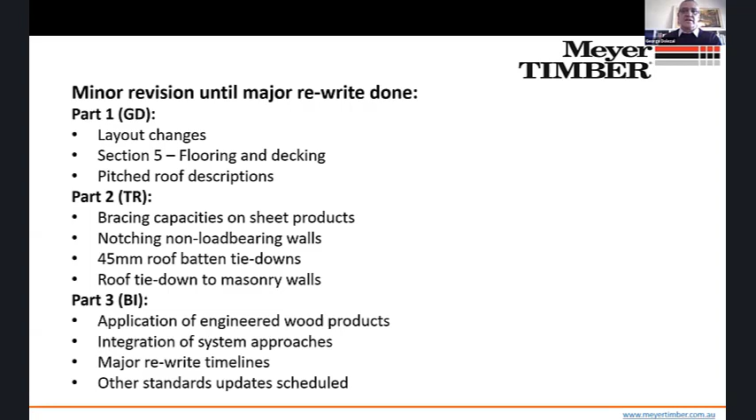To start off with, what standards does this apply to? AS 1684 has typically been broken up into 4 parts, and this 2021 revision refers to AS 1684 Part 2, which is the non-cyclonic areas, and AS 1684 Part 3, which is the cyclonic areas. Looking at the other standards in the group, AS 1684 Part 1 1999 was used and is still used as a basis for the span tables in the supplements, so it's still current and available.

Most of you will know that this has been superseded in 2016 with AS 1720 Part 3. AS 1684 Part 4, the simplified non-cyclonic version, is still current and is based on the original AS 1684 Part 2 2010. Being a simplified version, it's not extensively used but is still current at the moment. Finally, we look at the supplements or span tables to both AS 1684 Part 2 and Part 3 - they remain unchanged at present.

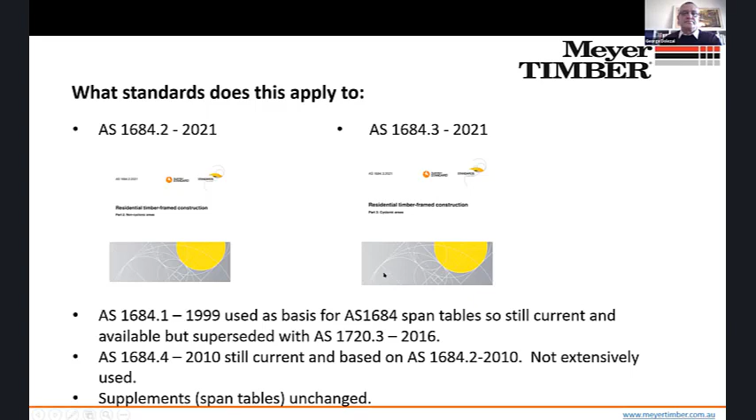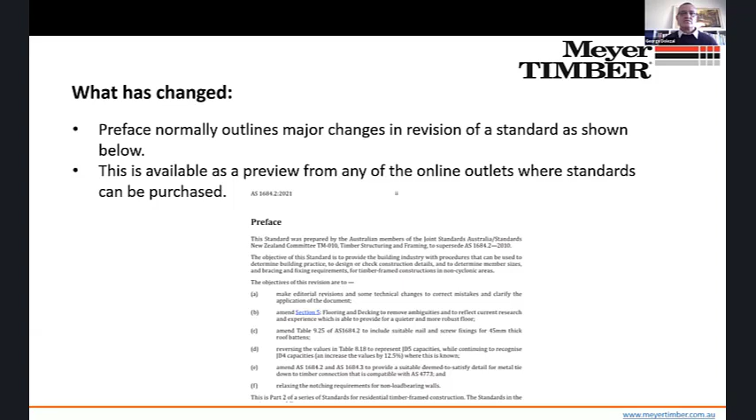If you really want to know what this is before you buy a standard, or want to see what has changed, you can go onto any of the online outlets - I'll note these at the end of my presentation. If you access that standard, there's a preview page, which will usually give you the first 5 or 6 pages, normally through the table of contents and the first page after that. So you'll actually be able to look at the preface and see what's been changed and what the major revisions are in the current version.

So AS 1684 Part 2 and Part 3, what changes have been made? First, there are administrative changes - there's been some changes in the order of sections to match the protocols for current standards.

An example of this is the terms and definitions, which in the 2010 version were in Section 2 and took up a large part of it, whereas now they've been brought back to Section 1 to bring it in line with the current protocols on how standards are laid out at the moment.

There's also been a number of changes to comply with accessibility requirements for online documents. This is a protocol that Standards Australia have chosen to go with to allow accessibility for those who require it. When you look at online documents, things like reading views and automatic reading of documents, certain protocols need to be taken to allow this to occur effectively.

The main areas you'll see changes are in the tables, particularly in Sections 8 and 9 - Section 8, the bracing section, and Section 9, the tie-down section. There are a lot of tables there which were combined.

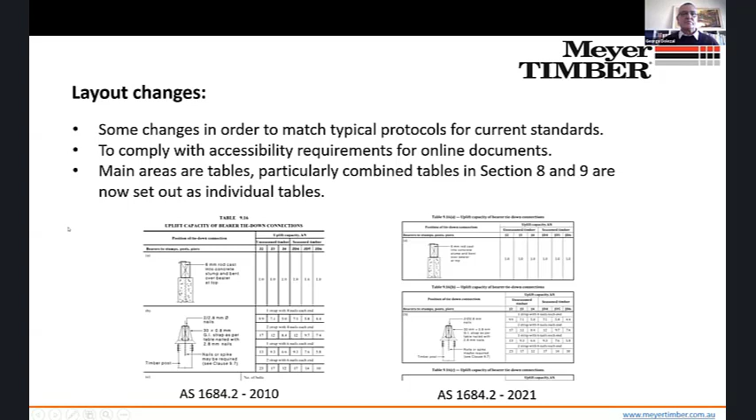That means you'll also find that the document, which was 270 pages long or so, is now about 320 pages long, just to allow for the extra room to have all those extra headings and changes. It's not that anything technical is affected, but there are some reasonable layout changes in there.

If we have a look at the section on flooring and decking, section 5, one of the main things that was confused a bit was what type of flooring and decking did that mean to take into account. So there's been a clarification there saying that it's for structural strip flooring and not overlay flooring. That's included both in the original general section at the beginning, where it says it has to be laid as a structural element directly onto the joists, and it's not applied to timber flooring that is fixed over the top of a structural subfloor. So it doesn't relate to overlay or engineered floors.

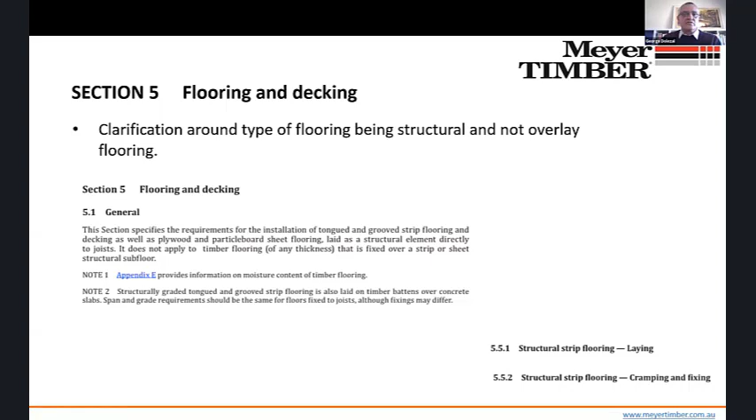And then in each of the sections after that, as you can see in the bottom right-hand corner of the slide, we've included the word structural in there. So you've just gone from strip flooring now to structural strip flooring. Note 2 as well says that it will also comply to structurally graded flooring that's laid on timber battens over concrete slabs. Again, so this section is totally on structural and not engineered overlaid flooring.

If we have a look at the expansion joints, a couple of minor changes there just to keep in line with current practices, in that if you're doing a wide expansion joint, that's been increased from 10 mil to 12 mil, and there's a requirement there to have a cork-filled gap and have it blocked underneath that.

So there still is the alternative there to have a number of smaller gaps rather than the one expansion joint, or to have the boards loose cramped if you've got quite a large width there. There's also been a note added to that section which gives you more emphasis on acclimatisation and trying to make sure that the moisture content of the boards matches the in-service moisture content.

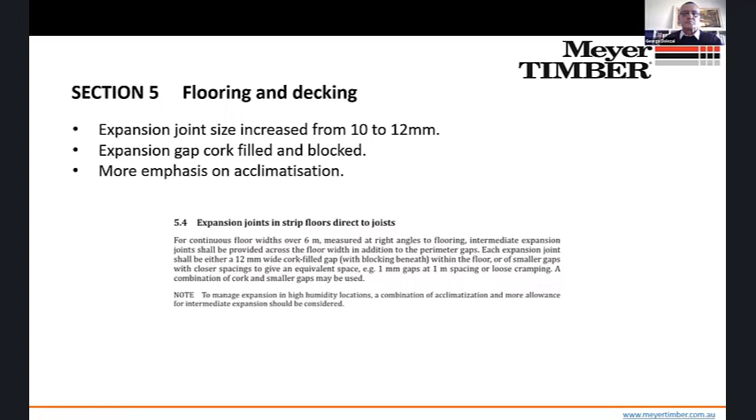From here we look at the nailing of boards. So there's been a single nail fixing allowed for boards up to 65 mil wide. We've had a requirement there that flooring adhesive is required for all boards over 85 mil wide face fixed. And if you have a look at the section, it says that the mechanical fixing shall be supplemented by a minimal 6 mil bead of polyurethane or polymer flooring adhesive. So that shall means that it's a mandatory requirement.

In standards, the word shall means it has to happen to comply with the standard, and the word should is a strong recommendation.

The other thing that's happened in here is if you are face nailing, there's a single option for nails, and engineered wood products have been included. Table 5.1 used to have different nail specifications for hardwood joists or softwood joists, whereas now it is a combined specification. So it's one nail, 50 mil long nail, for hardwood, softwood, LVL or I-joist joists underneath.

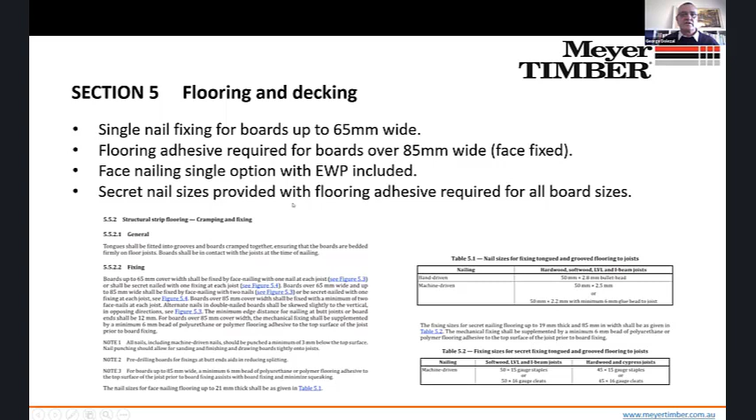And finally, we've added some secret nail sizes into the specification, and flooring adhesive is required for all board sizes. The 2010 version of the standard did not have any recommendations for sizing of secret nails for the flooring.

If we look at plywood and particle board flooring, there's been no changes there. The only addition has been a note, and again, notes in the standards are recommendations. So a note suggests that if you're putting an overlay flooring on top of a sheet flooring, like a plywood or a particle board, and if that overlay flooring is above 750 kilograms per cubic metre, so a hardwood overlay flooring, then it's recommended that you put screws and adhesive to fix the plywood to the joists. And that is both for plywood and for particle board flooring.

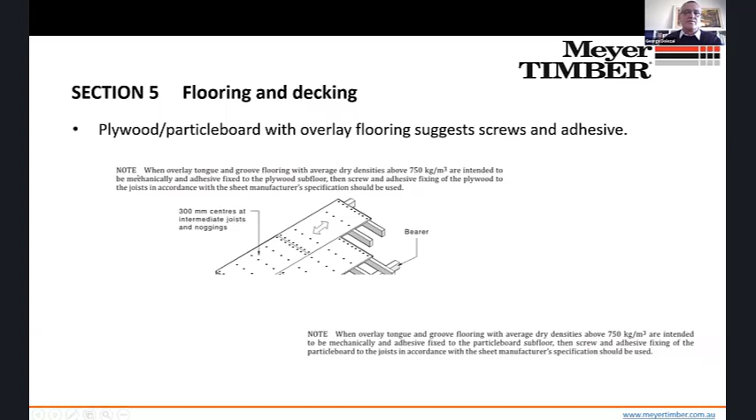And finally, in section 5, with the clause on decking, clause 5.8, the maximum deck board used to be 100 mil width, but now it's been increased to 140 mil width to allow for the increase in those medium-sized decking boards that has been taken up.

And screw fixing has been included for decking boards. So again, only being a recommendation, on table 5.5, note 1 down the bottom allows for a 10 gauge by 50 mil long screw to be put in for boards. So they're really all the changes for the flooring and decking section.

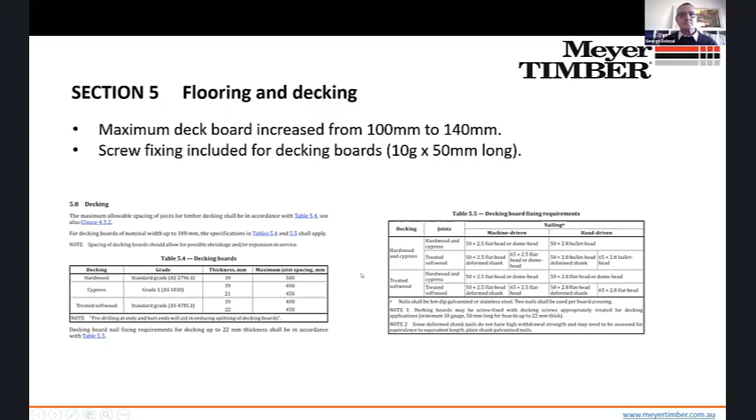Now, if we look at pitch roof construction, there's clarifications really around the two definitions. When we have a pitched roof, there's two types: we have a coupled roof and a non-coupled roof.

The definition of a coupled roof says there are horizontal members that combine with opposing rafters to create a triangulation of the roof structure. The note down the bottom says that in a coupled roof, both gravity and wind forces can be resisted by axial forces.

In the rafters, collar ties, and ceiling joists. So those two words, triangulation and axial forces, mean that a coupled roof has to include those three components. It obviously includes rafters, but it has to include a collar tie and ceiling joists. Especially those ceiling joists, which are at the support base level, provide resistance to the axial forces and stop spreading of the rafter pairs.

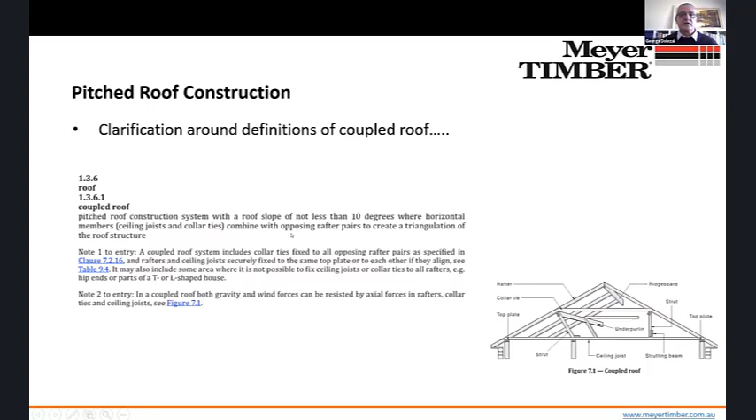If you compare that to a non-coupled roof, it's quite simple. A non-coupled roof does not incorporate triangulation. That means that rather than having ridge boards, collar ties and ceiling joists like in a coupled roof, a non-coupled roof requires ridge beams and intermediate beams. These are full support beams that support the roof.

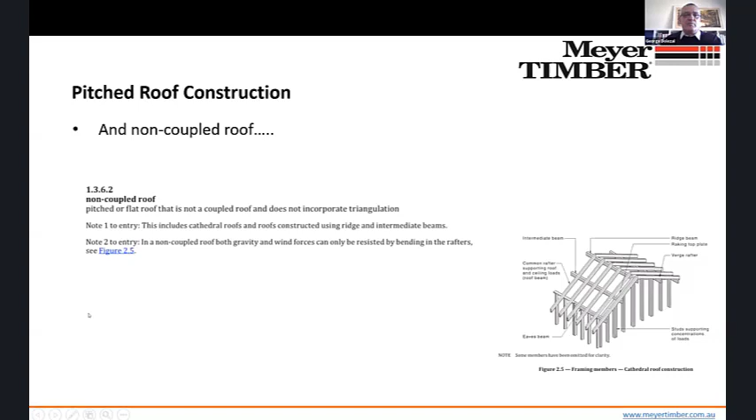Now, that doesn't mean that you can't actually build that or do that. What it means is that roof needs to be specifically engineered, and especially the connections and the design of the rafters need to be engineered to resist the loads.

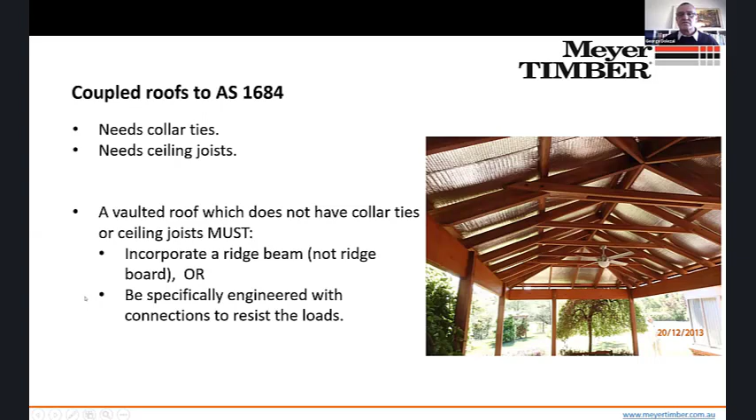So if you have a vaulted roof in a house, which is becoming more common in certain areas, al fresco areas and things like that, if it doesn't have collar ties or ceiling joists, then it must have a ridge beam, or it must be specifically engineered with connections to resist the loads that are applied to it.

Okay, so there you go. That's the end of part one.

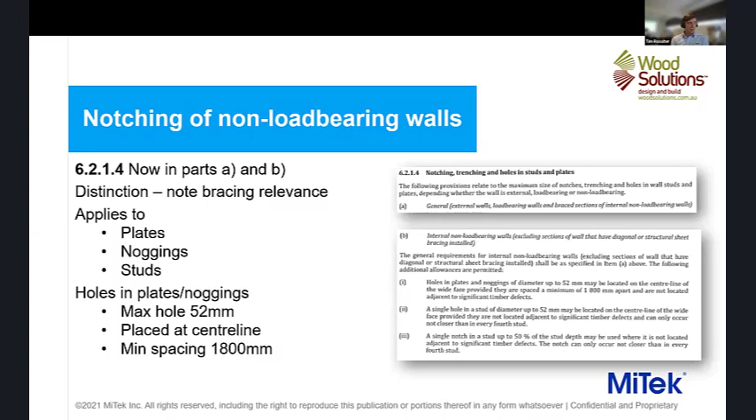If we move into studs, same thing, 52mm hole. You're only allowed 1 per stud, and it can only be 1 in 4. So that means if you've got a requirement for an HVAC plumbing system or pipe work going through non-load bearing walls, if you're going to this sort of size, you can't put it in a line stud by stud by stud by stud adjacently.

Also talks about notches - maximum 50%, only 1 notch per stud, and again only 1 in 4 adjacent. Now it does make a comment in the code, which is up to a little bit of interpretation from those doing the inspection, and that is that it's not to be adjacent to a significant timber defect. So it's up to the judgment of the inspector or the carpenter or whoever's putting the hole in the stud as to what a significant defect is and how close adjacent happens to be.

So a bit of common sense - you've got a loose knot, you go put a 52mm hole, there's not much timber left, there's more air. So keep things a reasonable distance away. And I use as just a generic term 'not adjacent to'.

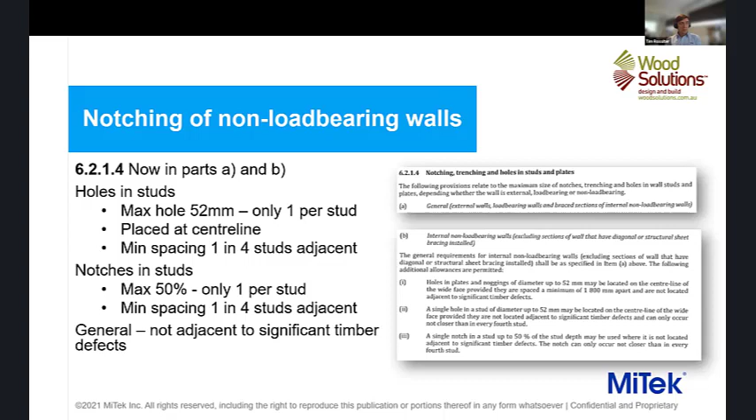A couple of notes from things that didn't make it into the construction practices, and that's a clarification on block grading. There's been some discussion in recent times around the requirement for members within a wall frame to be graded - which one should be, which one shouldn't be. It's clearly noted that noggins are not required to have a structural grade. It's not clearly noted that blocks are not required to have a structural grade.

And there's a standing request for change in the next round of 1684 that's been put up to try and deal with the fact that the code is silent on whether blocks should be graded or not. There's been a bit of interpretation in both directions from multiple people, but there are no specific instructions within the code. So that's a hole that just needs to be plugged.

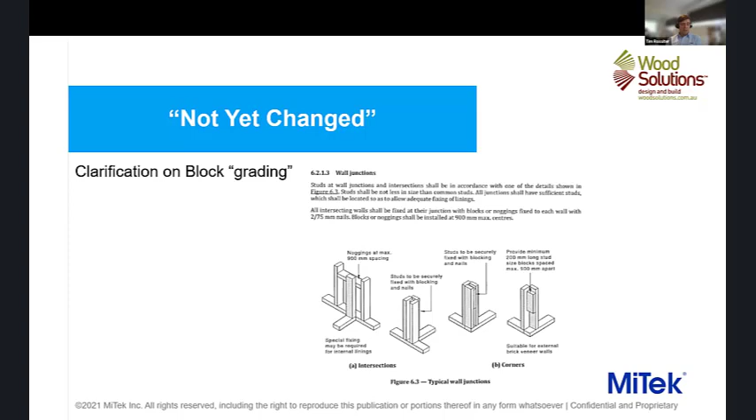So moving on from construction practice to bracing, this is probably the section where you'll see the most significant change that actually isn't a change. So the bracing capacities for sheet braces - when you first glance at the table, you'll see the number on the right-hand side of the screen there. If you do a lot of bracing calculations, you'll know that number is 3.4.

Well, it's no longer 3.4, now it's 3. The reality is it hasn't changed. What has changed is the recognition that the more common material in use these days is JD5, and the least common is JD4. When these tables were originally created, it was the reverse.

There was a note put in the code that basically said, if you're using JD5 stud material, then you shall reduce the capacity 3.4 by 12.5% for the G to K plywood brace systems, and by 16% for the hardboard systems. Remembering that a sheet brace or ply brace, the capacity of that brace is not contained within the material itself, it's within the connection to the framing around it.

If you've seen any tests done of racking forces for sheet brace, you'll find that the predominant mode of failure is a nail pull-out in the corners. As the force is applied, you get tension and compression, and you'll find that in this corner, the nails will pull out of the plates, and then the nails will pull out of the studs in the same region. Then you get excessive movement, and the brace is ostensibly failed because it's a deflection check. It's very, very rare to have a burst out where the nail actually bursts off the material. Most of the time, it's going to be a nail pull-out.

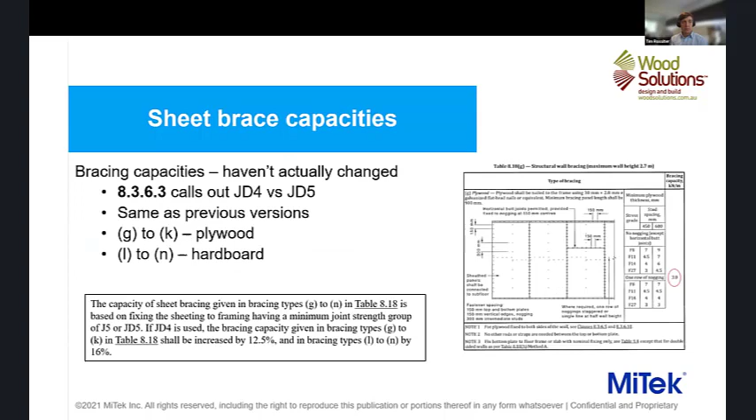So you see diagram H, method A, M12 rods, if you're putting ply on both sides. That makes it clear, if you're putting ply in accordance with diagram G, and doing it to both sides, to tie that down you're going to need M12 rods at either end. That makes it crystal clear how to manufacture that. If you're using diagram H and putting it on both sides, plywood fixed to both sides of the wall, go to those other clauses because the loads get quite high.

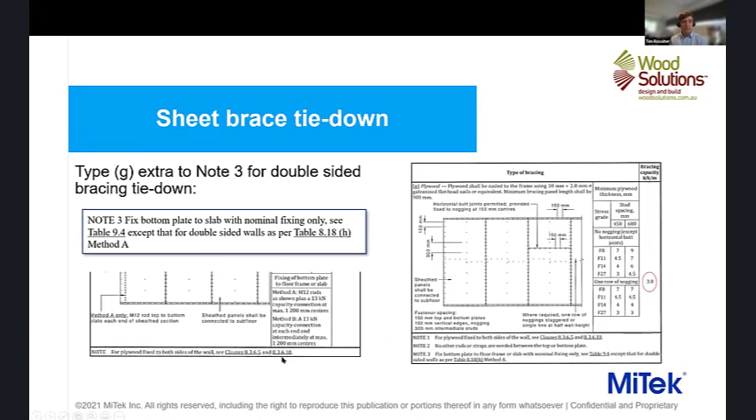So the capacities get quite high. If you're multiplying these numbers, 5.6 and 5.2, and then you double that again, the amount of tie down at the ends is quite significant. So you need to refer to these other clauses to get the right tie down capacity so you can transfer that load down through the building.

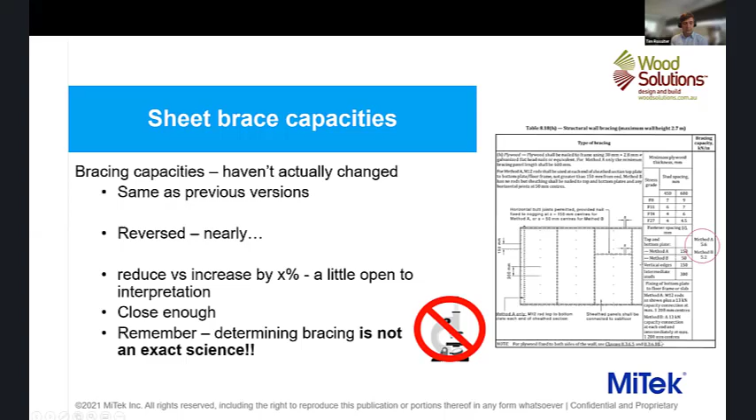Quick note about not yet changed. A fairly common material these days in the marketplace is JD6. You'll note that in all the tie down sections of the code, you can do tie down calculations for JD4, JD5, and JD6, but it hasn't yet crept into the bracing section. So in the list of things to be looked at, that would be a good one to include, as to what the capacity reduction for bracing is using a JD6 based material.

The other one that is markedly absent is the inclusion of OSB. OSB has been around for decades now, and the manufacturers have certifications on how to do the bracing calculations. They are not joint group dependent for the base material, and they've done tests to prove that.

But the reality is that OSB is probably most commonly used as a brace board in 2 of the 3 major East Coast states. I've been involved in jobs in the past where a general practice engineer did a building inspection and couldn't find OSB within 1684, so failed the building as being non-braced. In fact, he thought it was a decorative plywood in that instance, so we were able to direct him to the right documentation and get him back on the right track. But it would be good for the code to recognise common materials, JD6 being one and OSB being the other.

A little bit on tie down. There's not a huge amount of change, just a recognition of some of the realities of things done that haven't been in the code in the past. One is the ability to tie an upper story to a lower story and bypass the floor system altogether. Currently within the code it's a linked chain - you connect your upper story to your floor system to your lower story, and it's a 2-link chain. There's quite a valid way of doing that connection by bypassing the floor system altogether, running a strap past the floor from top frame to bottom frame.

So that's now included in the code as a deemed to satisfy solution. Be a little bit wary about the lengths of these straps, because to fit 12 nails at the end of each strap, that's a fairly long bit of material.

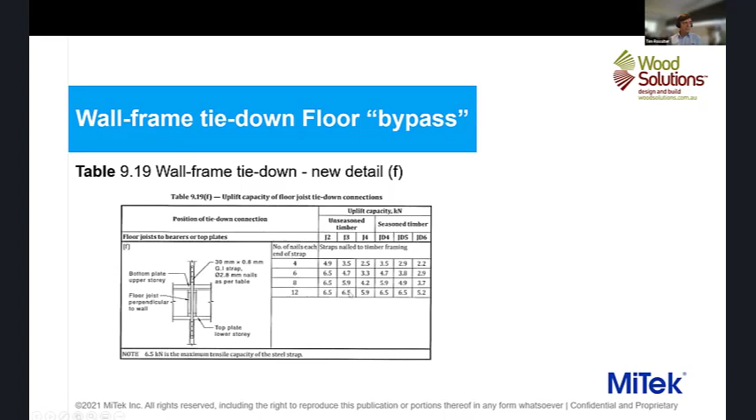The other gap that's been in the building industry for a while is that gap between masonry construction and timber frame construction. 1684 has been very clear on load path if you build everything out of timber. And the AS 4773 masonry code has told us how to connect framing material to brickwork, but it hasn't crept into the same standard. So that's been recognised and they've been brought in together now - these details are common to both standards.

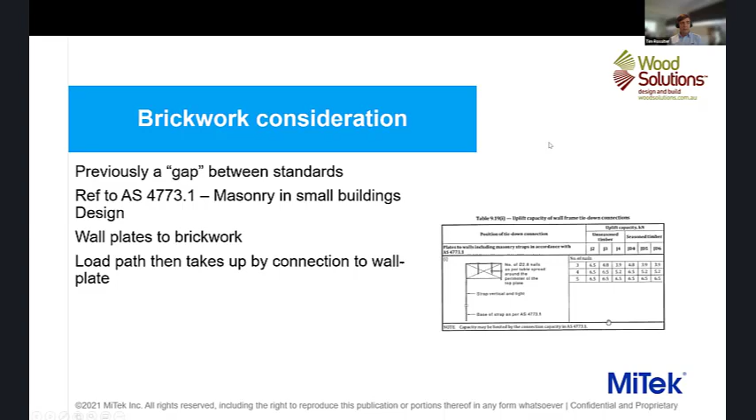And we've got two new details put into 1684. One is attaching a timber plate to the brickwork, and then you can take your load path from the timber plate back up into your roof system. And the second is to bypass the wall plate altogether and go either off a beam, rafters or trusses, all the way straight down into the brickwork, and then strapping the beam down. So you can have a top plate here that's irrelevant - you've strapped the rafter directly to your brickwork, and your top plate, which is like a washer in that instance, isn't doing any connection loads at all.

You can do it this method as well, where you attach the batten over the top of the heel of the truss, down into the brickwork. There are details as to how you're supposed to strap into the brickwork with cross members, how many courses are supposed to go down. All those details are in 4773.1.

Be wary of corrosion and exposure to the coast, because as soon as you start attaching metalwork to masonry in a salty environment, you can encourage corrosion. There are rules about what that base material needs to be, depending on your proximity to salt spray or ocean. So you're going to need both codes basically, but at least the documentation is the same between the two.

Watch out for the batten design. The batten design here is a 90 by 45 MGP10 or 90 by 35 MGP12. That is not a common batten material. So if you're going to use a tie-down batten, you need a stronger batten at that point to take that load. The other note I would make is that there's an allowance for up to 5 nails evenly around the perimeter of a 90 by 35 or a 90 by 45 material.

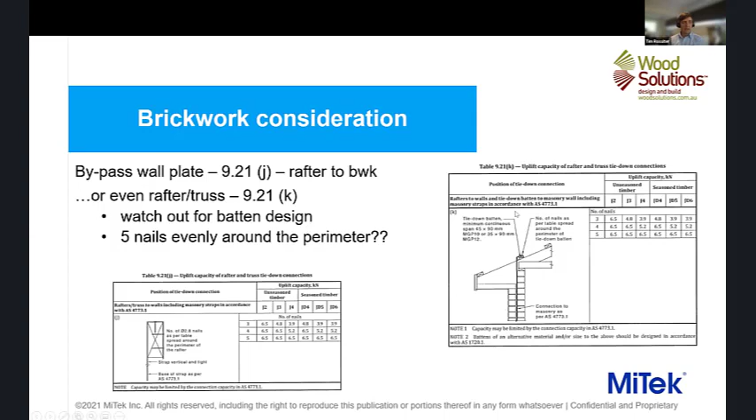The last tie-down detail I wanted to cover was just a recognition that there are some materials in the marketplace that are not imperial - your 38 and your 50 mil batten. There's a 45 mil batten that has been used for quite a long time, so it's now been added and recognised in the code as an existing batten type, and capacities have been given.

Note that if you're going to use 2 screws, it's got to be 75 mils wide minimum. So basically that means it's going to be a 90, because there's not much 75 base material standardly in 75 by 45. So you're going to need 90 by 45 to use 2 screws, 70 by 45 you can use a single screw, and here again is your capacities.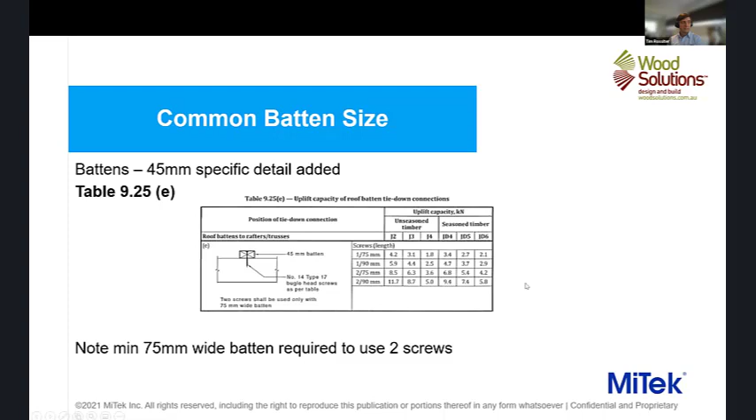That's all that I've got in my section to go. So I'll allow the questions to flow in the chat and hand over to Boris.

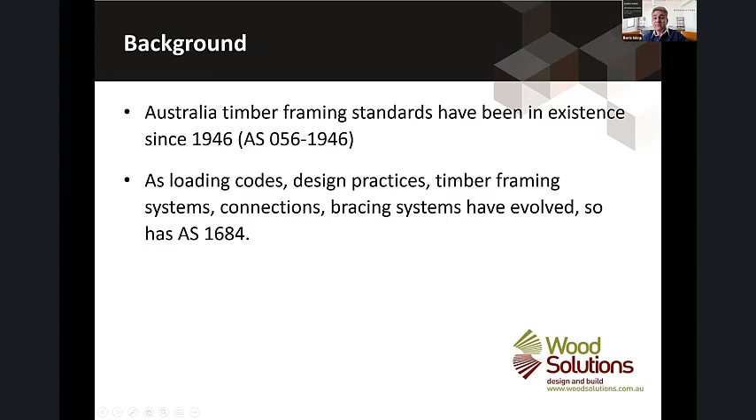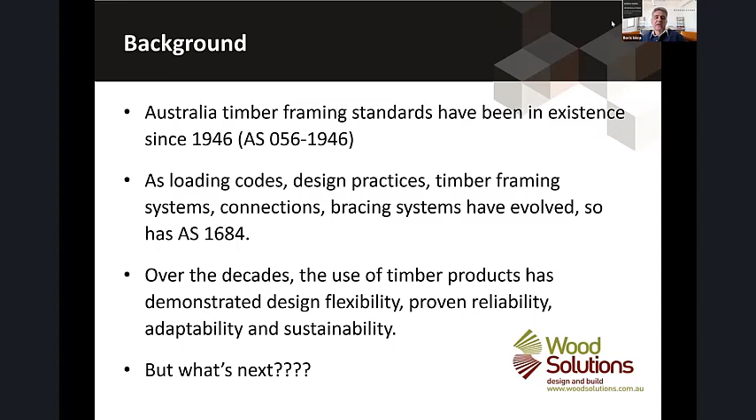AS 1684 has been around for quite some time. The original version of the Australian standard came out in 1946. Over the years, as the loading codes have changed and practices evolved, AS 1684 has evolved too. Over the decades of use, there's been a whole range of timber products used, demonstrating design flexibility, proven reliability and adaptability. As we go forward, the need for sustainable building materials has never been as strong from a climate change perspective. But where can the standard go, and what should be done to improve its use or provide new building systems and elements?

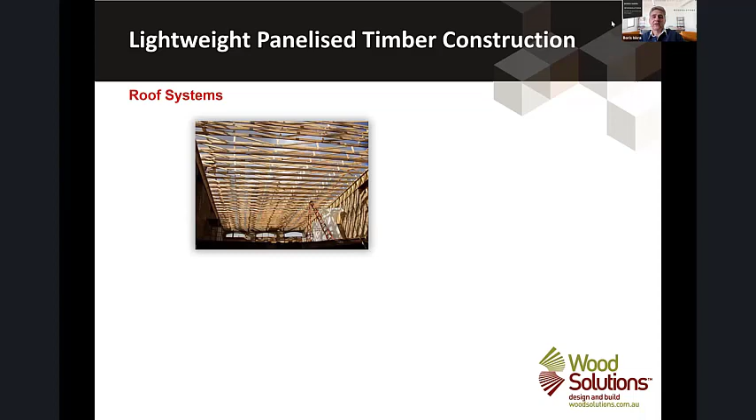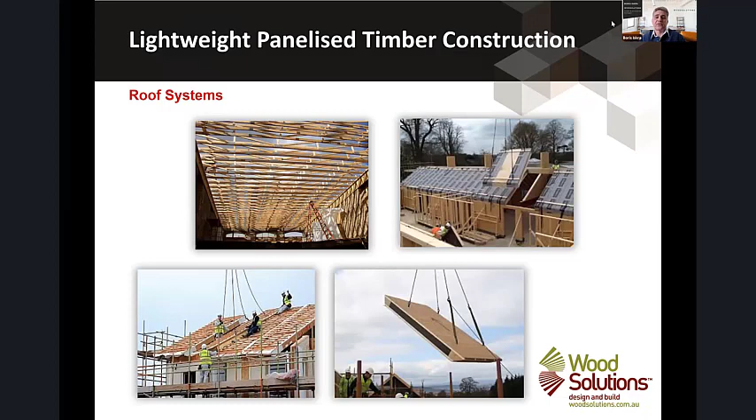One of the key areas being developed is lightweight panelised systems. You can use a panelised system for wall framing, and if you're looking at roof systems, you can use a panelised system there as well, but it needs some thought as to the use of the element and connecting it to the timber frame system. Today we're having more prefabricated systems used to construct our buildings, and there is a need to start considering the use of these other elements with our traditional frame systems, but also in our wall systems.

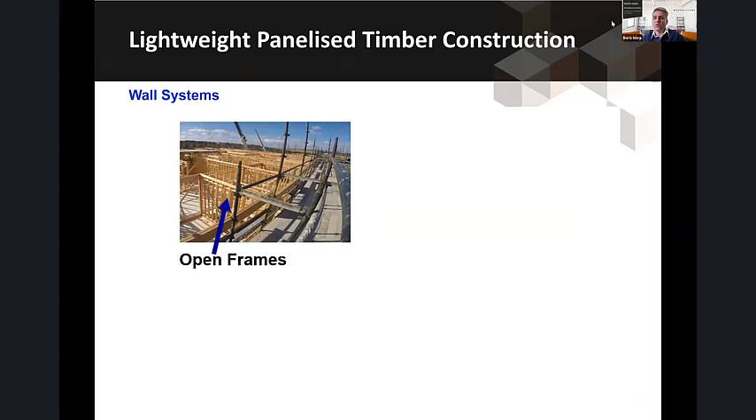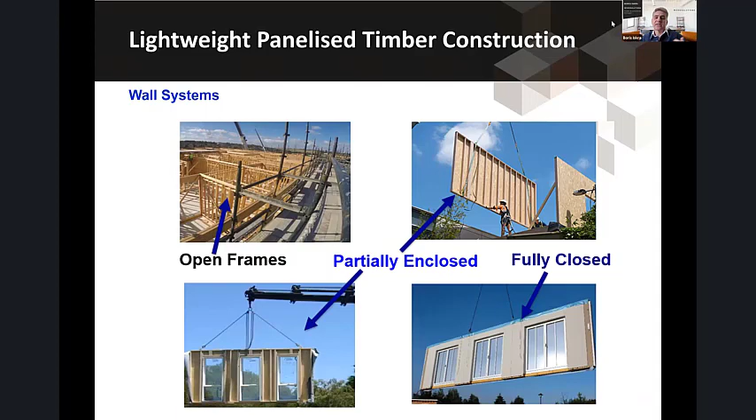Our traditional open frames are either prefabbed or on-site stick built. But we're now moving into partially enclosed systems where we're cladding some elements and installing window elements, or going into fully clad systems. We just need to start thinking about the modification of 1684 and how we incorporate these systems.

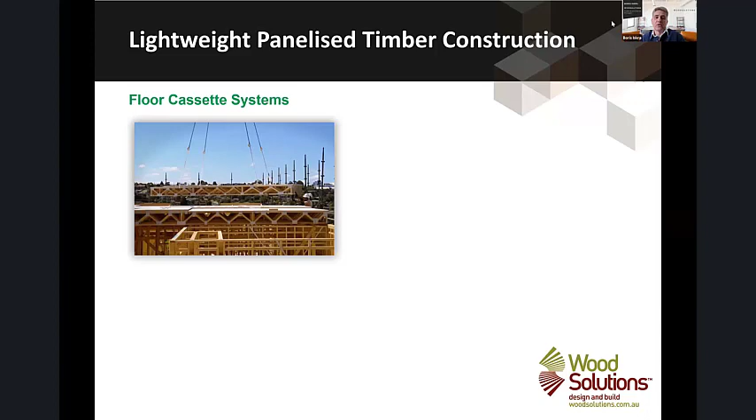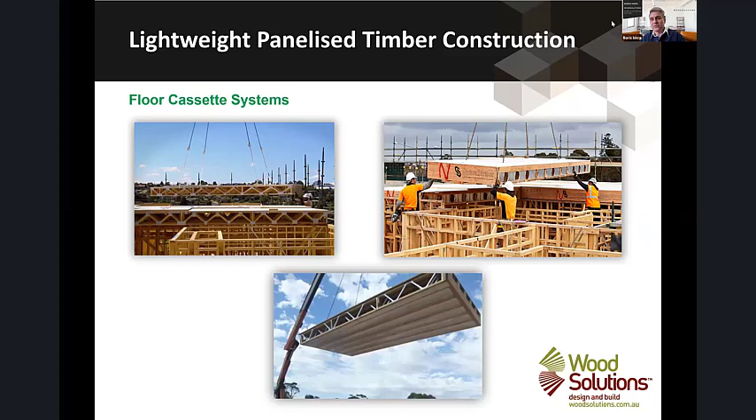There's also a whole lot of floor cassette systems being used even today on the first floor of a two-storey house, where we can just drop in floor cassette systems to enable speed of construction. I'm not saying you can't do that today, but more that 1684 should start to think about the adoption of these new systems and incorporating them into the standard itself.

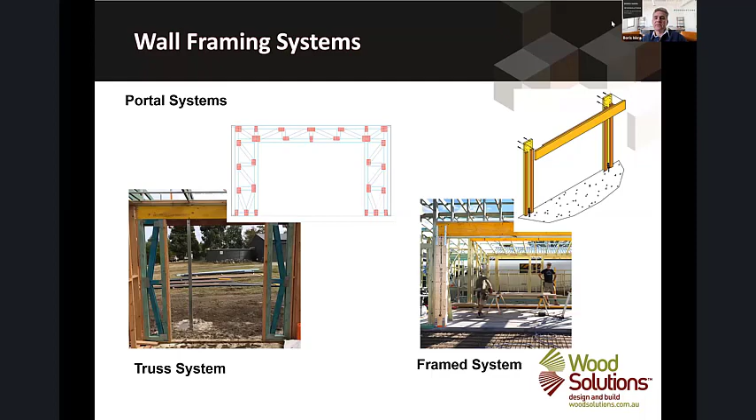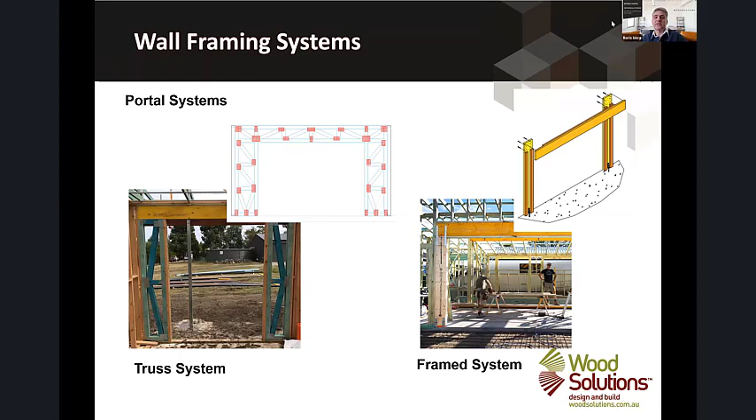There are other ways that we can frame systems. We can start to introduce portal frame systems into 1684 to take out lateral loads in our buildings and enable us to do wider openings. There are some building systems being promoted today in the market, both truss frame systems as well as typical framed material systems. There's no reason why these systems can't be genericized and put into AS 1684 as brace or portal systems.

As mentioned previously, I think Tim mentioned the use of oriented strand board. That is being used in the market. There was a chat comment about being careful to make sure it's manufactured in accordance with an Australian standard. At the moment, we don't have an Australian manufacturing standard for these products, but they're manufactured to a standard by the supplier or manufacturer, who certifies it's been manufactured in accordance with an American standard or an international standard.

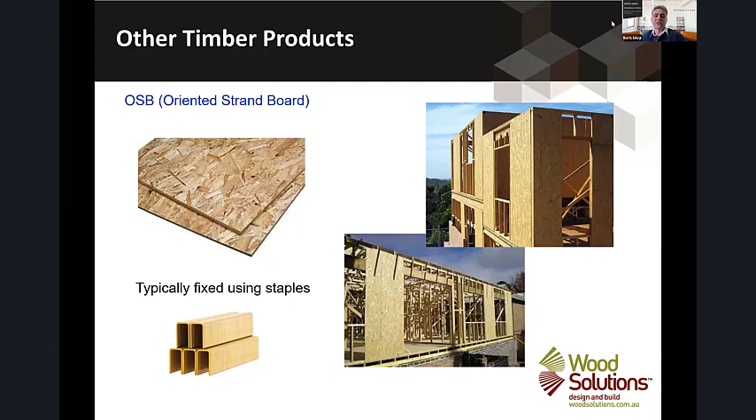One of the key things is also the fixings used to install these panelised bracing systems, typically just using staples, and 1684 at the moment doesn't look at the use of staples, it typically has nailed systems. We need to look at this because these systems are being used, have been tested, and are proving to be very efficient and a very useful system to have. So 1684 does need to look at these other building products and materials.

Some of the other benefits are looking at fully sheathed systems. Obviously you can do that with 1684. I watch a lot of construction and building shows from overseas. The top right-hand image is typically of an American house, and you'll see there's basically no noggings in that wall frame. When they sheathe the house, as we can do in Australia, they'll tend to not put noggings on those external walls, though they'll have internal noggings on internal walls where they don't have the ability to sheathe it. We should be looking at how we can adopt these concepts here in Australia and make more use of them. These panelised systems are very beneficial to our frame and truss sector, since the simpler we can make the building systems, the more efficient they can make the manufacturing process.

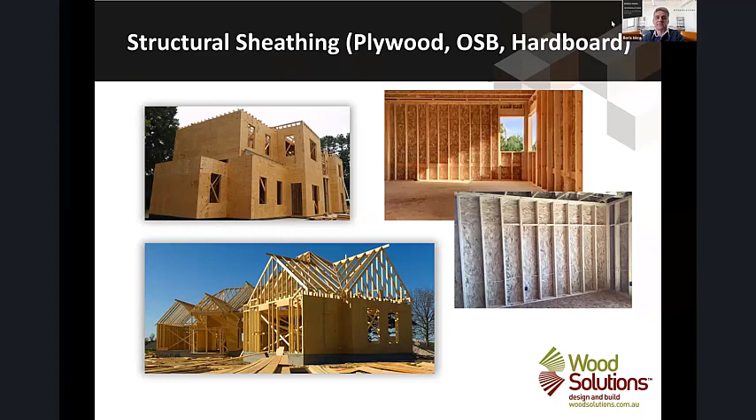There's also a whole range of new connectors being used that we don't have in 1684, typically a lot of screw type connectors.

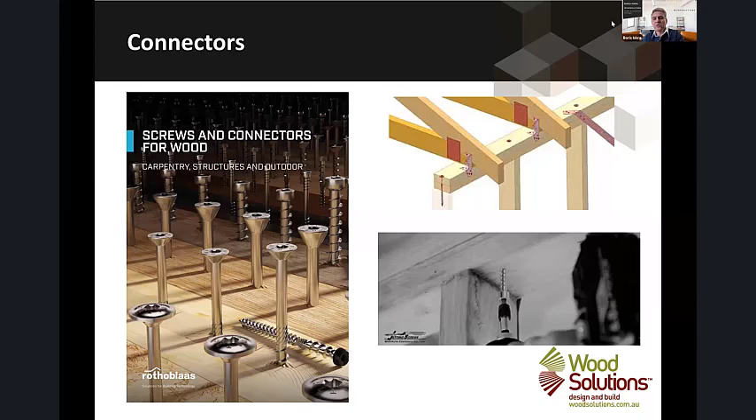The image at the top right shows screw fixings through plates into wall studs, and the image beneath it is screw fixing from below the top plate, from underneath, screwing up into a rafter or a truss. These systems are in place today being used overseas, and we should be looking at how we can adopt and use them here in Australia as well.

But what about the use of a higher or greater number of stories in our buildings? There's a lot of 3-storey townhouses being built that can be done in an 1684 approach. Andrew will recall that we do have 3-storey stud frame and wall frame designs for 3-storey buildings that were released probably 15 to 20 years ago as span tables. So we knew how to do it back then, but it just hadn't flowed into 1684.

So industry had these as generic documents. But going through the formal public comment process, putting these documents out and getting feedback, I think would be very beneficial for the development of 1684. So this is one of the areas that I think there might be an opportunity for further development. Any ideas or suggestions would be greatly appreciated, either via the Q&A section, or if you have any other thoughts after the webinar, through info@woodsolutions.com.au, and those comments will be forwarded to myself or Andrew as part of the development of 1684.

As part of trying to also assist in the use of 1684, industry has developed user guides to try and show how 1684 can be used. So there's design guide number 1, generally about what nominal fixings are versus specific fixings, and when you need to use a specific fixing design, such as tying roofing battens down to your roof frame, as opposed to a nominal fixing, where it may just be fixing of bottom plates in a low wind classification to a slab or to a timber subfloor. So there are some information sheets or guidance that can help people in the use of 1684.

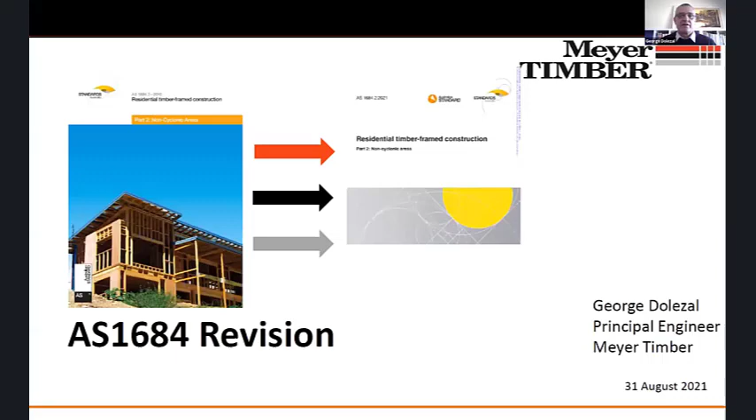Yeah, that's a very good one, and it's very hard for the standard to account for every single scenario. As soon as you try and put every scenario in, the first building that gets assessed is going to have something totally different in there. What we have said in the standard, underneath that coupled roof construction, there is a note that says in certain areas it may not be possible to have collar ties and ceiling joists on every single rafter pair, and that brings in areas like Scotch valleys and hip ends. So it still says that it is part of a coupled roof construction. I suppose it's a matter of people looking at whether you have large areas which don't have full triangulation, or how you actually get to that triangulation, but that'd be on a case-by-case basis.

Okay, George, thank you. Question for you, Boris. This is from Steve. Is it envisaged, and can you include the reason why, 1684 Part 4 will continue to be published in the future?

Yeah, look, I did hear George say that 1684 Part 4 is not used that often, but I'm based in Victoria, and I'll say that it is sold quite a lot here. It is a very simplified document, so it takes a bit of that design work out, while still being based on Part 2. I think you'd find there'd be some reluctance to getting rid of Part 4. I know Wood Products Victoria also provide sales of the publication, and I think it's their biggest seller from the AS 1684 suite is Part 4 here in Victoria. So I don't think it will be lost.